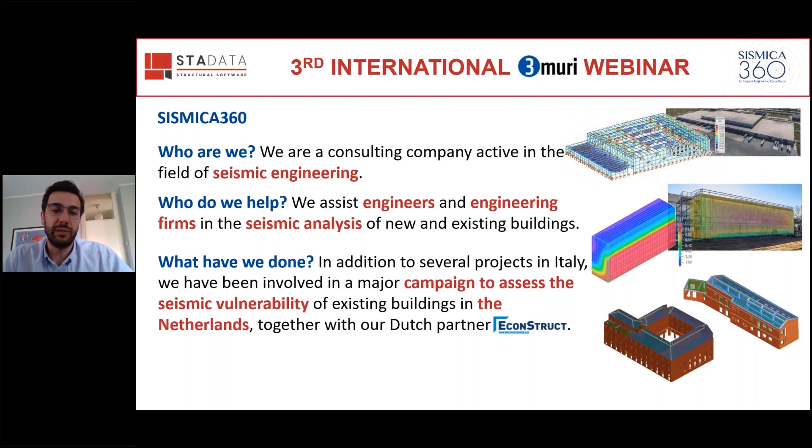This includes a major campaign to assess the seismic vulnerability of residential buildings in the Groningen region in the Netherlands, in which we participated together with our Dutch partner, Econstruct. From 2018, we have analyzed about 300 buildings in the Groningen region. This campaign will serve as the background for my presentation today, which is based on our daily professional activity.

The issue of earthquakes in the Groningen region is linked to gas extraction. The gas field was discovered in 1959 and is the largest in Western Europe in terms of size. The problem is that 90% of the buildings in the region are built with masonry and were not designed to withstand seismic forces.

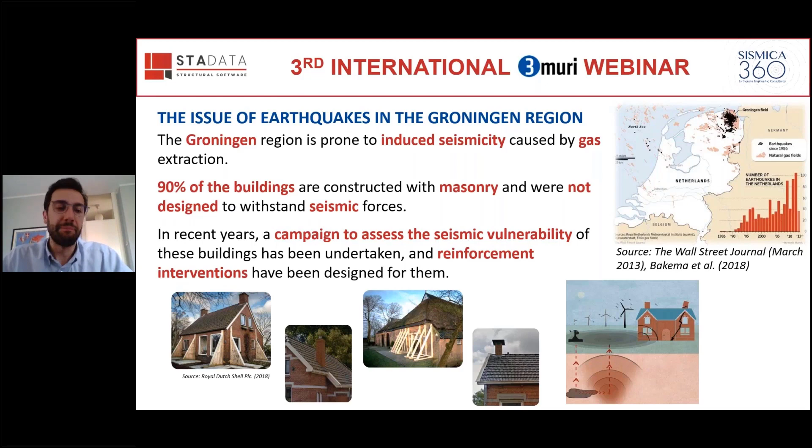For this reason, since 2014, alongside the reduction in gas extraction, a campaign to assess the seismic vulnerability of buildings in the region has been started, in order to identify any critical issues and reinforce buildings where necessary. The seismic vulnerability assessment is carried out

in accordance with the guidelines NPR. These guidelines have undergone several modifications and updates over the years, leading to significant differences in the definition of the seismic capacity of buildings.

These guidelines are available in 3Muri among the list of national codes that can be applied in the calculation. The NPR guidelines differ quite significantly from the codes we are accustomed to, such as, for example, Eurocode 8. In the bottom box of the slide, you can see some peculiar characteristic aspects of this guideline.

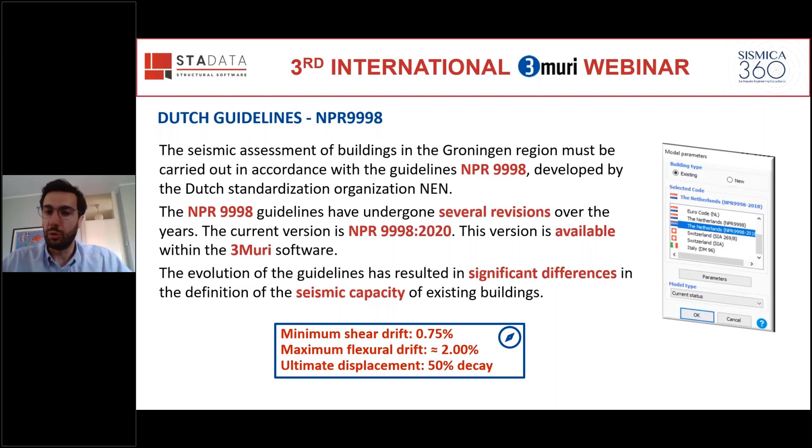The newer NPR guidelines push the structural capacity much further than, for example, Eurocode 8, as you can see from these values.

We have talked about the capacity. Now let's discuss the demand. The seismic input is obtained from what is called the NPR web tool, which is essentially an internet accessible database. By entering the geographical coordinates or the address of the building, it provides the elastic spectrum and other data that can be useful in structural analysis.

Due to the progressive reduction in gas extraction, the seismic input has significantly decreased over the years, which has had a major impact on defining the demand. At the beginning of the assessment campaign, in 2018, for example, most buildings required rather major retrofits.

In particular, diaphragms were being retrofitted by stiffening them in any case, and so there was no emphasis on analyzing them with their real flexibility. With the various updates of both the guidelines and the seismic input, the trend changed and the need arose to analyze buildings using the real stiffness of the floor diaphragms. So single wall analysis became very important.

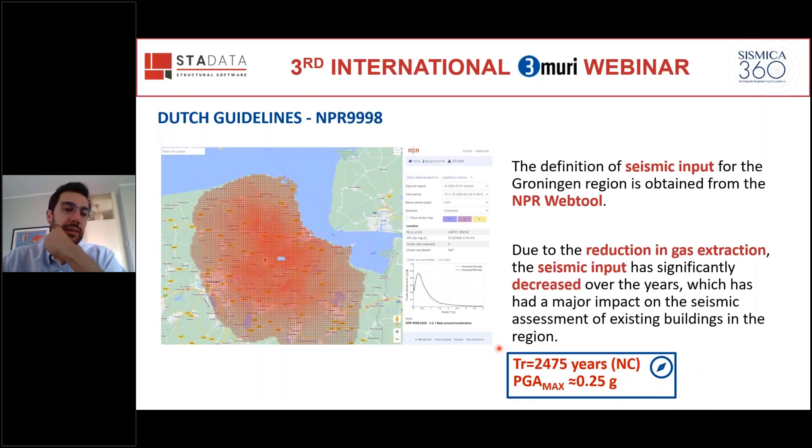Also in this case, at the bottom of the slide, I present some information regarding the Dutch case, so the return period, the PGA, the maximum PGA.

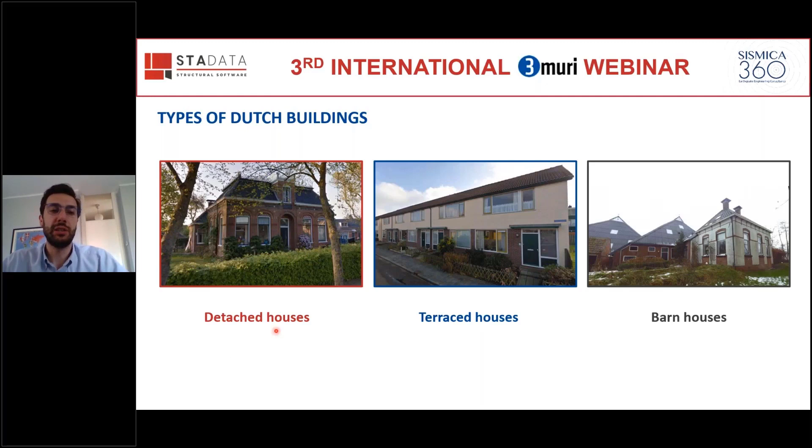The buildings that my colleagues and I have come across over the years mainly fall into three typologies: detached houses, terrace houses, and barn houses.

Regarding wall type, Dutch buildings have much thinner walls compared to those we are accustomed to in seismic countries, like for example Italy. The majority of the structural walls have a thickness of around 100 millimeters and are primarily made of two materials: clay and calcium silicate.

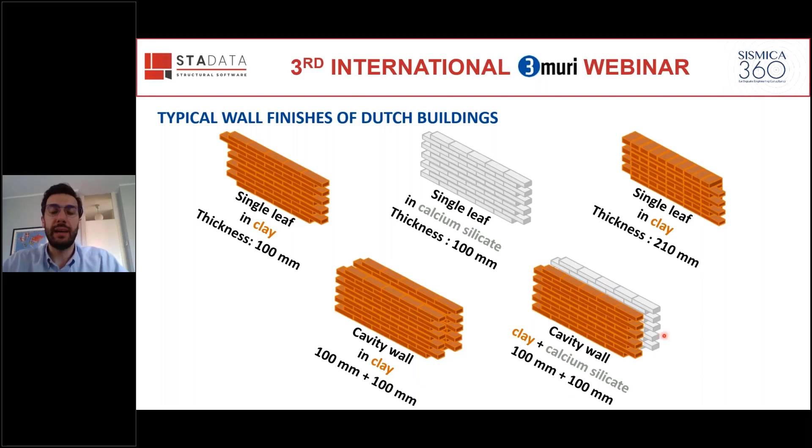The use of calcium silicate began around the 1960s. Thicker single walls of 210 millimeters are typical for perimeter walls in buildings from the early 1900s, while newer buildings have cavity walls on the perimeter.

Let's focus now on the floor diaphragms. We can have three major structural typologies. The first one is timber floors, timber diaphragms, constructed with either simple boarding, or one or two panels of OSB, oriented strand boards. These three solutions have increasing stiffness.

The second structural typology is hollow core slabs, which can be of two types. The first one is a very typical Dutch component: the Nehobo slabs, which are hollow core slabs made with perforated brick units connected with cement mortar. These were commonly used in construction from the 50s to early 80s, and usually they cannot be considered as rigid.

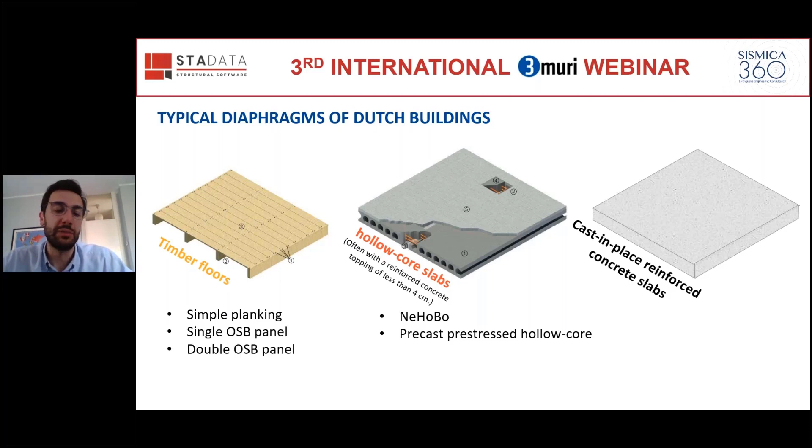The second typology of hollow core slabs are the pre-stressed hollow core slabs. These are typically used in construction from the 80s onwards and often have a collaborating topping sufficient to be considered as rigid. Lastly, we have the cast-in-place reinforced concrete slabs that can be considered as infinitely rigid.

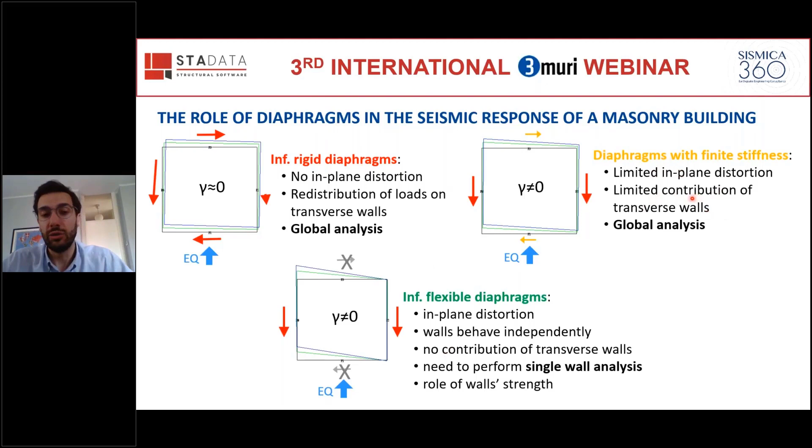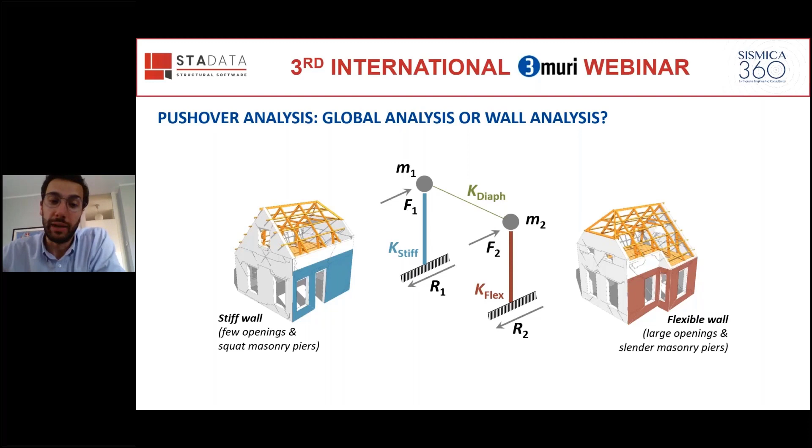If the stiffness of the diaphragm, the green one, is much lower than that of the walls, especially the more flexible one, the red one, K-flex, in that case each wall is responsible for the mass concentrated at its top. Therefore, in this case, the most representative analysis type is the single wall analysis.

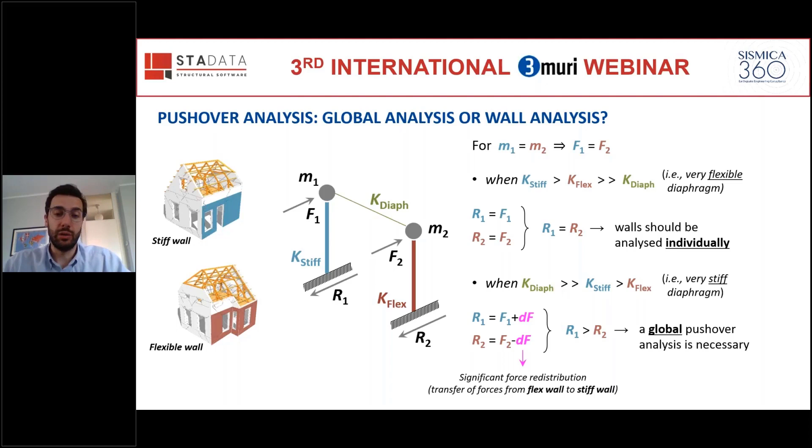On the other hand, if the diaphragm is much stiffer than the walls, global analysis can be used because the diaphragm can couple the behavior of the two walls, and torsional effects are also possible. In reality, actual buildings lie somewhere between these two scenarios.

Our approach is to consider the ratio between the magnitude of the stiffnesses involved. If the diaphragm, the green one, has a stiffness in the same order of magnitude as that of the walls, that is, if the K diaphragm is at least 10% of the stiffness of the weakest wall, the red one, in this case we perform global analysis. Otherwise, single wall.

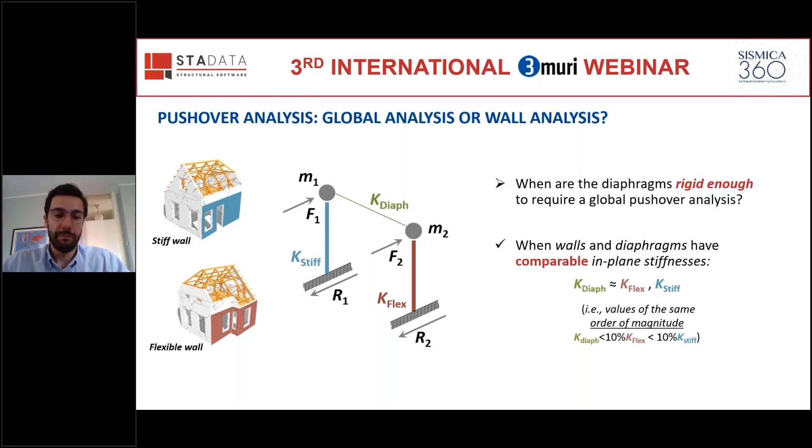So now the problem is how to evaluate the stiffnesses. Regarding the stiffness of the diaphragms, the NPR guidelines provide tabulated values of secant stiffness for different types of floor systems at various drift levels. Specifically, they provide values at two drift levels, 0.1% and 1%. Not all types of floor system are included in the tables, so for those not listed, reference can be made to specific scientific literature.

The biggest issue is how to evaluate the flexibility or stiffness of the walls. One might think of considering the elastic stiffness of the wall piers, which, however, is not representative of the nonlinear behavior of the masonry, and at the same time turns out to be a very high stiffness that almost always forces a single wall analysis in the case of timber floors or semi-rigid floors.

Therefore, we devised a more practical approach. And I want to underline that what I show you is our approach. It is not proposed in any official document. It is just a formulation we came up with to give us a rule in applying one type of analysis or the other.

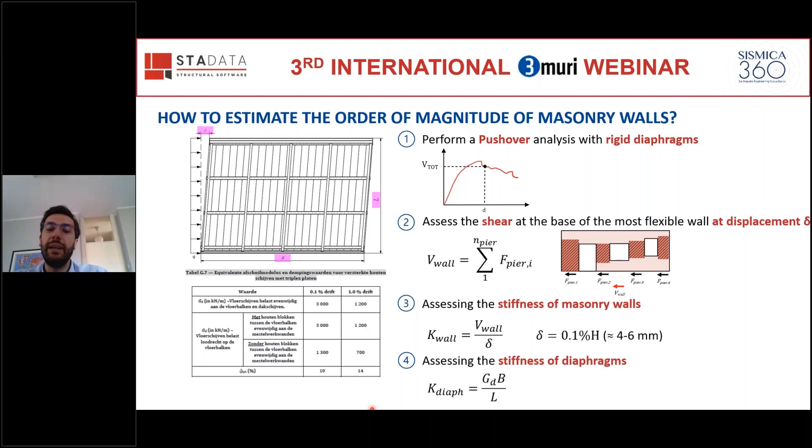Now I present a very simple case study, a building located in the village of Usquert, in the northern part of the Groningen region. It consists of a ground floor and a first floor located under a gable roof.

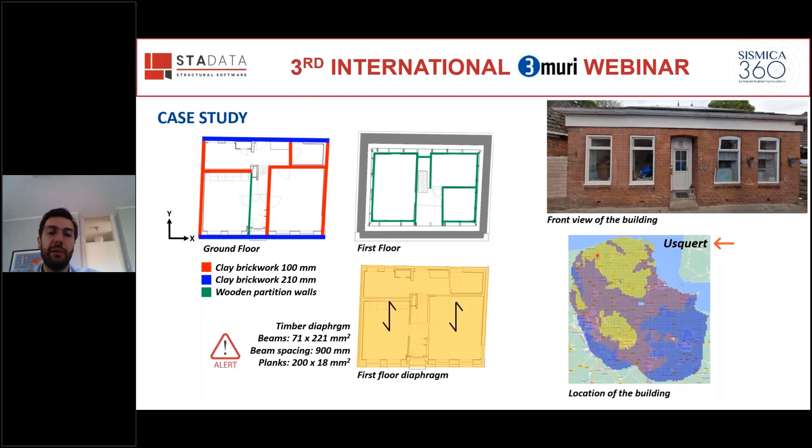Regarding the ground floor, all the walls are made of clay brick masonry, except for the wall indicated in green, which is made of timber. The floor separating the ground floor from the first floor is made of timber, consisting of timber beams arranged in the y direction with a spacing of around 1 meter, topped with timber planks. This type of diaphragm can be considered quite flexible.

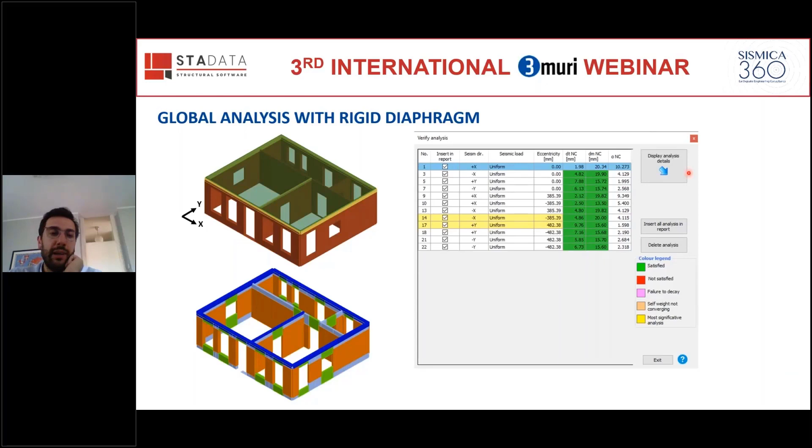So we apply our procedure. Step one, firstly we perform a global analysis with a rigid diaphragm in 3muri. Here are the results. Everything is verified, shown in green.

Now let's consider the walls arranged in the x direction, the direction perpendicular to the floor joists. We divide the floor into two diaphragm fields, diaphragm 1, the blue one, and diaphragm 2, the red one. We have to consider their dimension in order to calculate the displacement relative to the drift of 0.1%, for which we are going to evaluate the shear force at the base in each wall.

The relative displacement for a drift of 0.1% in the two diaphragm fields are: for diaphragm 1, approximately 5.5 millimeters; for diaphragm 2, approximately 2.25 millimeters.

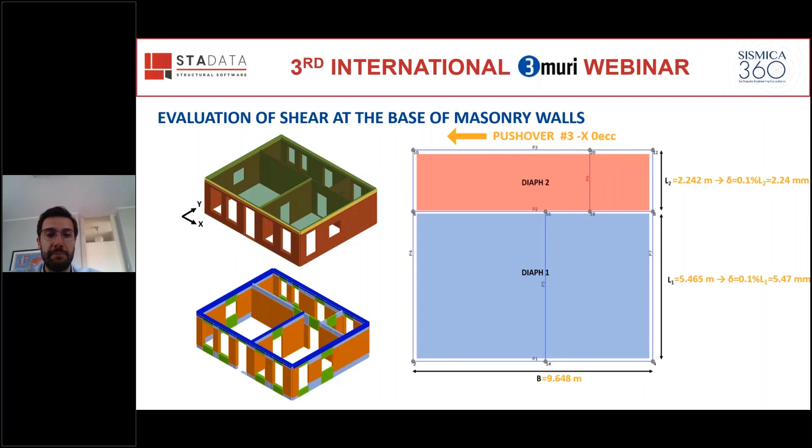Now let's refer to an analysis in the x direction, such as the pushover number 3 in the negative direction without eccentricity. At this point, for each wall, we can query the results from 3muri and extract the shear values of each element of the wall in the x direction at the target displacement that we have calculated.

In this slide, I present an example for the wall P1. This wall is connected only to the diaphragm field number 1. So the displacement at which we evaluate the shear is 5.47 millimeters. The closest pushover analysis step to the target displacement for wall P1 is at a displacement of 5.48 millimeters.

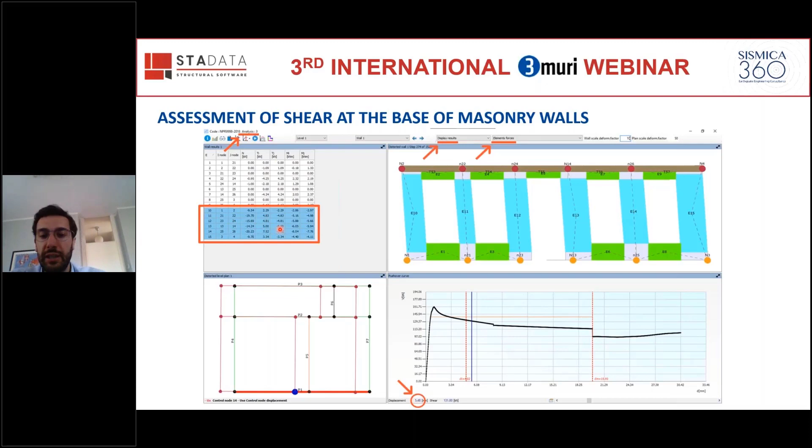We can extract the tabulated values of all the elements belonging to that wall, and the total base shear for this wall P1 will be the sum of the shear values at the base of these elements.

We follow the same procedure for all three walls in the x direction that we are analyzing, and the results obtained are shown in this slide. We can see that walls P1, P2, and P3 have base shear values approximately equal to 28 kilonewton, 66 kilonewton, and 48 kilonewton, respectively.

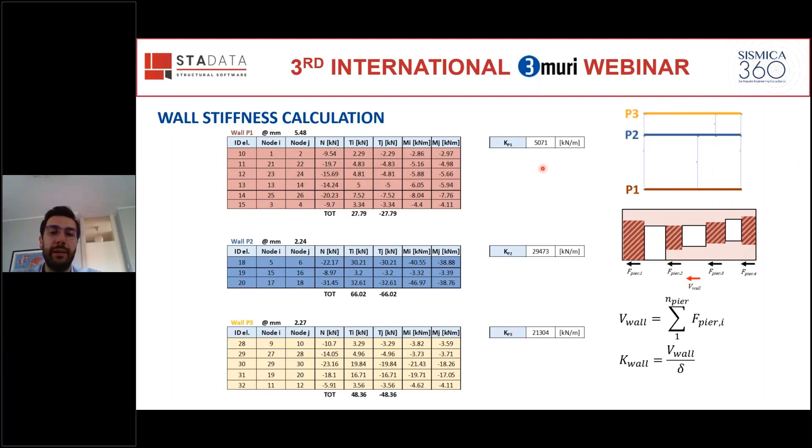By knowing the base shear and the associated displacement at which it was evaluated, we can now compute the stiffness of all three walls, denoted as KP1, 2, and 3. It can be observed that wall P1 is the most flexible.

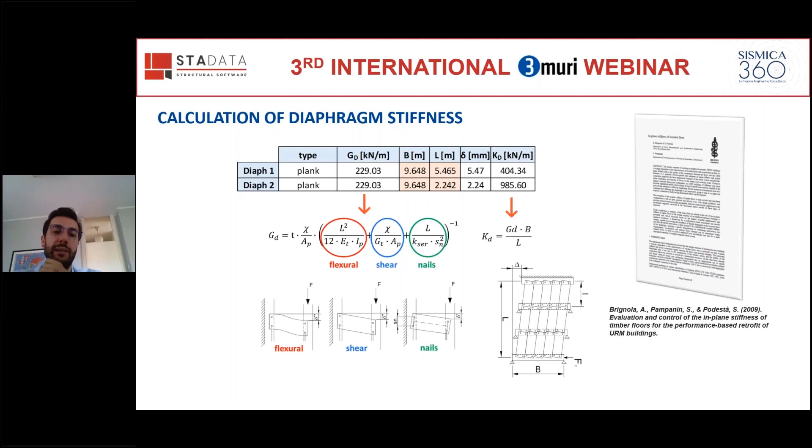We evaluate now the stiffness of the diaphragm using the approach proposed by Brignola et al., which depends on three contributions: the flexural contribution of the planks, the shear contribution, and the slip contribution of the nails.

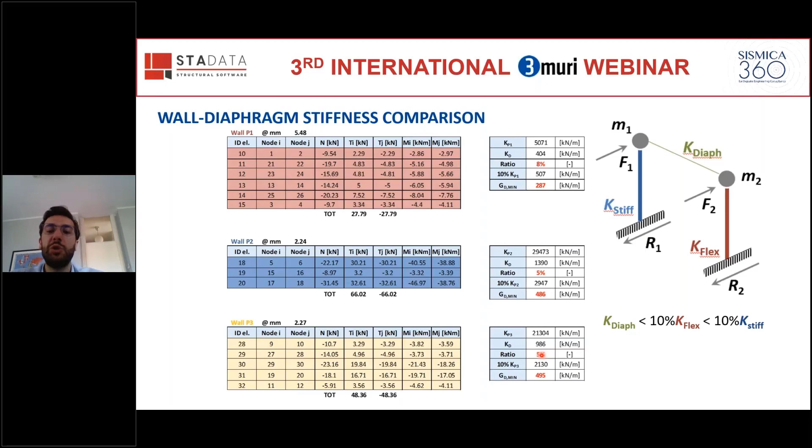Now, knowing the stiffnesses of the walls and the diaphragm, we can compare them and see if the diaphragm stiffnesses are in the same order of magnitude as the wall stiffnesses. As you can see, the ratio between the two stiffnesses is always less than 10%. Therefore, we can conclude that the diaphragm stiffnesses are not in the same order of magnitude as the wall stiffnesses. So according to our practical approach, we should perform single wall analysis.

Out of pure curiosity, I performed two analyses, one for each direction, on the global model, but this time I included the actual stiffness of the floors to observe the behavior.

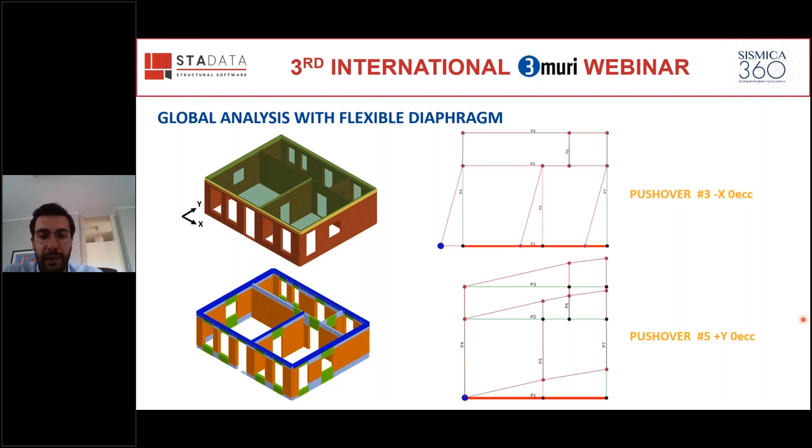As you can see, the shear deformation of the diaphragm is significantly pronounced, and in the X direction, the global analysis transforms into a pseudo single wall analysis, more or less, with no meaningful outcome.

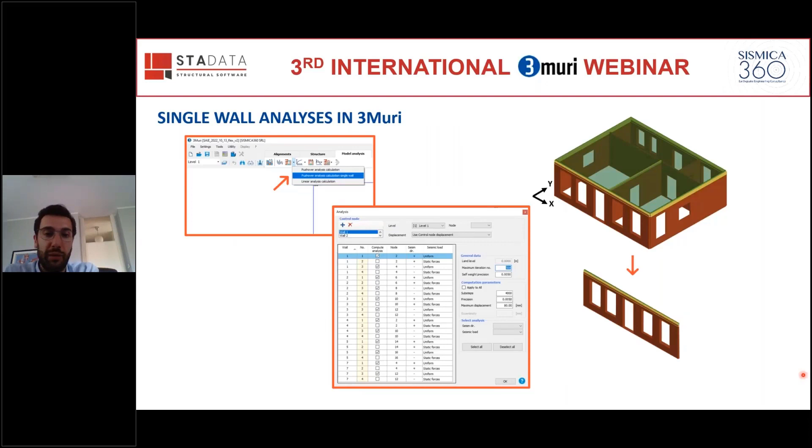At this point, we will use the single wall analysis tool provided by 3Muri, so we can compare the results.

However, the single wall analysis for wall P5 resulted in a red color, indicating that it did not meet the verification criteria.

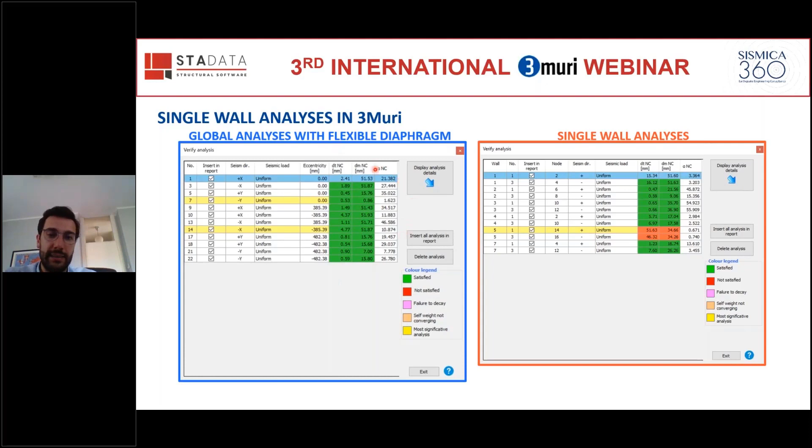Similarly, in this slide, I have provided a comparison between the global analysis conducted on the model with flexible floors and the single wall analysis. And once again, all the global analyses were verified, as indicated by the green color.

These are the results, the critical pushover for wall P5, and we can see that the ultimate displacement is reached at a drift of 1.3%, which is higher than the value prescribed by the Eurocode, which is equal to 1.06%.

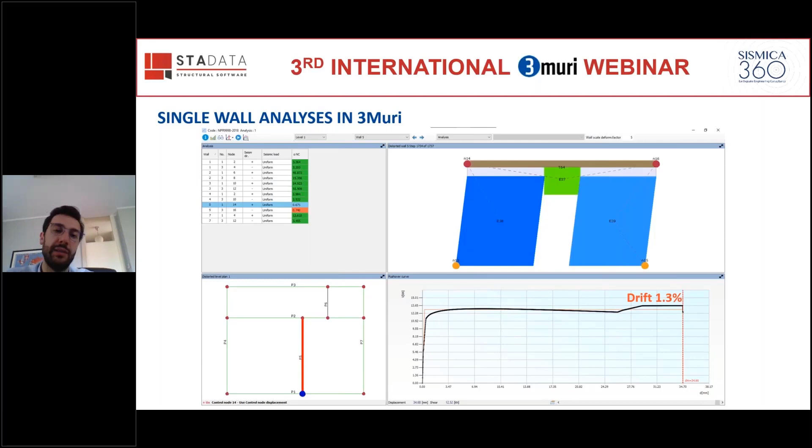In conclusion, diaphragm stiffness is a key parameter in assessing the seismic behavior of buildings, and for this reason, it is important to evaluate it as best as possible.

Through the procedure presented today, we have established a criterion for determining when to employ a global or single wall analysis. By comparing the in-plane stiffnesses of masonry walls and diaphragms, we can make informed decisions about the appropriate analysis approach.

The 3Muri software allows the user to define the in-plane stiffness of a diaphragm, and in case the diaphragm is not sufficiently rigid, it also allows the user to perform single wall analysis.

Finally, it is important to note that performing global analysis on a structure with highly flexible diaphragms may yield misleading results, as I showed before. Therefore, it is crucial to consider the relative stiffnesses of the components involved to ensure accurate and representative analysis outcomes.